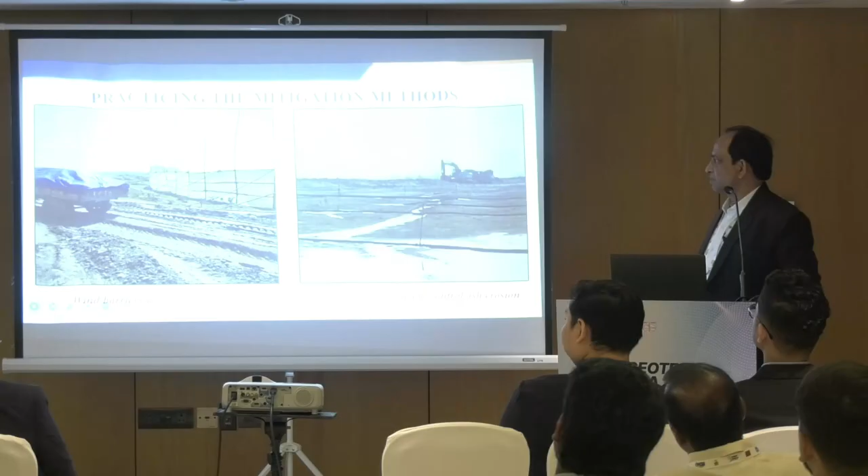Whenever we think of this EICP, enzyme-induced carbonate precipitation, we will go for this surface curing with the geopolymerization technique, wherein we add some chemicals. It can be sodium hydroxide, sodium silicate, like that. They have a mechanism of making polycondensation, and then it will go for hardening of the surface, hardening of the material, so that it will have proper gel, so that it becomes a thick and robust layer.

As all of us know, this geopolymerization is a process where aluminum silicate materials react with alkali activators that will form a hardened cement-like material to some extent, like geopolymer. And this shows significant promise as a long-term erosion control solution for the ash deposits because of two things - long-term stability along with some sustainable aspects.

Friends, this is the ash we got from Ramagundam, NTPC Ramagundam, which is one of the popular plants in South India. With a specific gravity of 2.18, it is a silty sand with good amounts of sand and silt almost equal, and with a very low UCS value of 0.13 MPa.

And then we have gone for this particle size distribution. This basic chemical composition turns out to be class F fly ash because of its low concentration of calcium oxide and huge amounts of alumina, silica, and ferrous oxides. So it turns out to be class F based on this chemical composition.

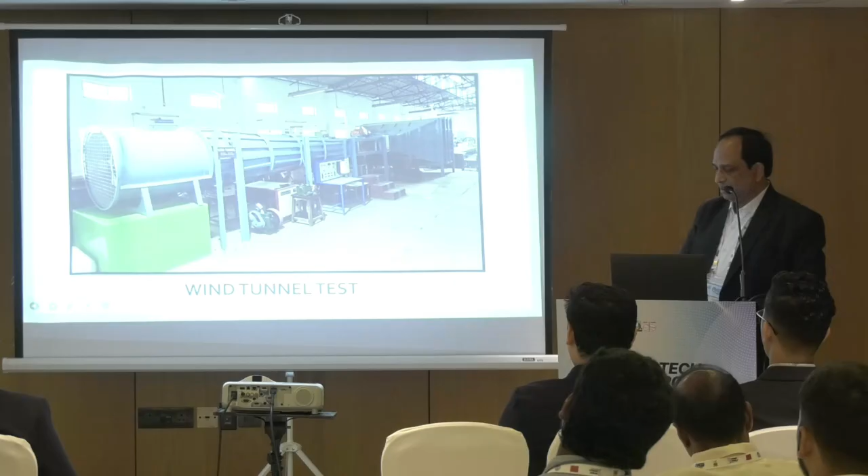This is the wind tunnel test available in the Mechanical Engineering Department of NIT Warangal, wherein we kept the sample here in a tray like this, and allowed the wind to blow at different speeds, and checked the layer, whether it is getting eroded or not. So the surface, as I have already mentioned.

This is the SEM test setup we have along with the EDS unit in CSRS lab in NIT Warangal. Coming to the results, as I mentioned, we had a UCS of 0.13 MPa only, but when we went for a chemical of NaOH with different curing periods, there's a 25 times increase in UCS value up to 3.5 from 0.13. And when we went for sodium silicate at different proportions of 1, 2 or 1.5, it has gone to around 9 approximately. So it has increased 70 times with respect to its original strength of untreated fly ash.

And this is the erosion, we measured rate of erosion. When we compare to the case of untreated fly ash at different wind speeds of 10, 20, 30, and as you can see here, when we went for different proportions at 10 meter per second, with different curing periods of 1, 3, 7, 14. Naturally the 14 day curing period gave very, very less erosion compared to the high erosions. At 10 meter per second, it was 7,500, whereas it has come down to 166, a drastic decrease in erosion.

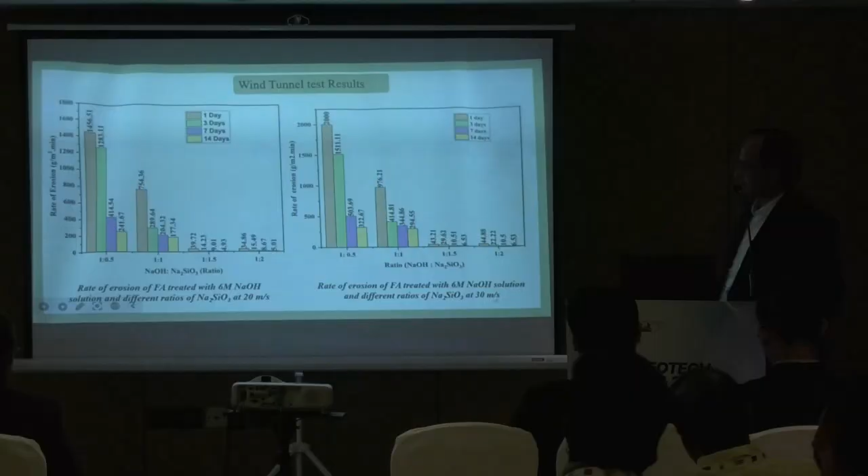When we went for higher speeds of 20 meter per second and 30 meter per second, there is also a drastic decrease. It's only 6.5 compared to my untreated condition of 14,000. So there is around a 99% decrease in the erosion.

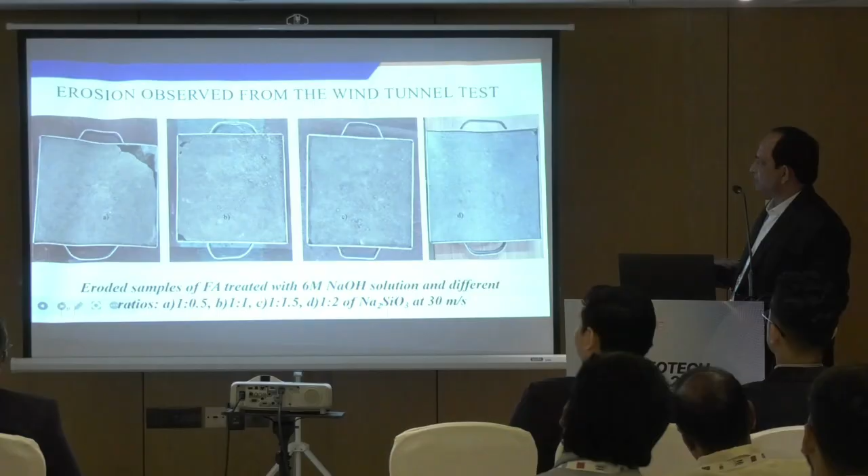These are the trays of different 4 trays for 4 different proportions we had at 30 meter per second. As you can see, there's a lot of erosion here, but not much erosion when you have gone for higher percentages of treatment.

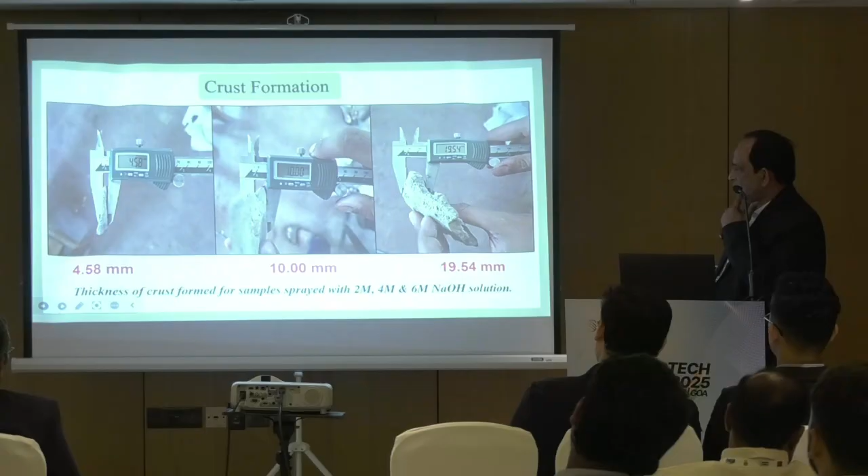Even in SEM, when we went for it, there is a good amount of gel formation for 6 molar based on our findings. Therefore we selected 6 molar even for sodium silicate addition. We calculated the thickness of the crust, how much layer is getting formed, and with different molarities of NaOH, you can see 4.58 and 19.54, almost 4 times increase with molarity, and it's a very good thickness.

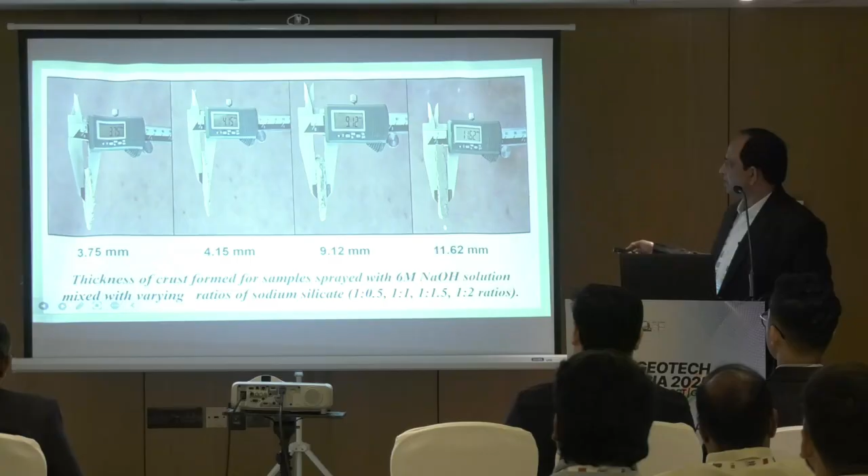The problem with NaOH is it is a little porous. Although it is brittle, we can easily break it. But friends, when we went for sodium hydroxide along with sodium silicate, although the thickness is less, it's a little stronger, that much brittleness. You cannot easily break it. That's the kind of finding we had, although the thickness is less compared to only NaOH, this is showing a little higher strength.

Coming to the conclusions, the present study investigated the erodibility of surface treated fly ash against wind erosion. This geopolymer stabilization of fly ash was evaluated using UCS as an indirect method and wind tunnel testing as a direct method to assess the erosion aspects of fly ash.

The compressive strength increased significantly when treated with sodium hydroxide and sodium silicate. Friends, the erodibility of untreated fly ash decreased by 99%, which is remarkable, when treated with 6 molar with different proportions of sodium silicate. Finally, the microstructure analysis revealed the formation of alkali-activated cementitious gels formed due to geopolymerization, which contributed to the formation of the crust.

Friends, the resulting crust significantly protected the surface from wind erosion, resulting in a dramatic reduction in the erodibility of fly ash with wind.

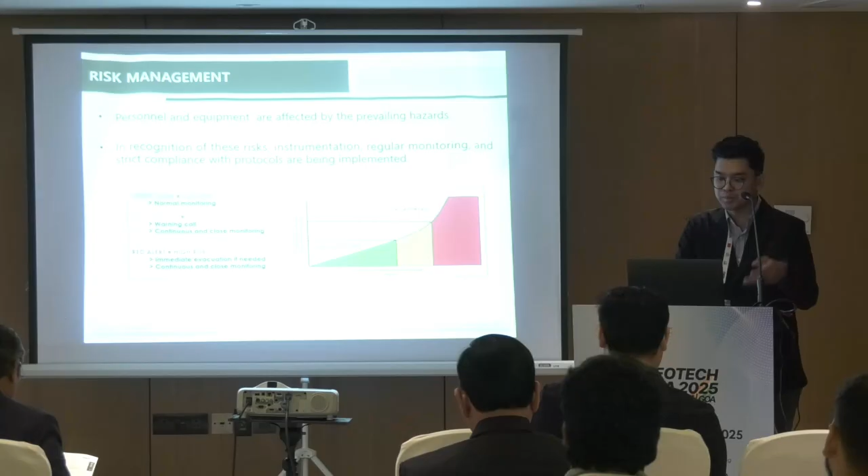For the succeeding presentation, we will be doing the baseline analysis. For the baseline slope models, due to the limited number of strength tests, our analysis primarily relied on data from exploration core boreholes or core samples.

This combination provided calibrated strength parameters suitable for stability assessments, while highlighting the need for additional in situ testing if possible. Since the open pit mine is situated below sea level, the analysis was modeled under fully saturated conditions. These assumptions provide a conservative approach to account for potential groundwater influence on slope stability.

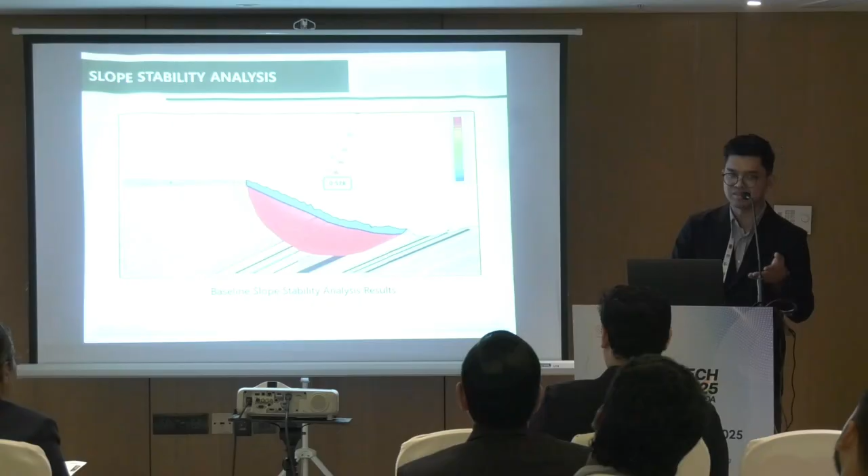As such, sensitivity analysis is needed to establish a more appropriate and realistic set of shear strength parameters and subsurface conditions. So what is sensitivity analysis in slope stability? It is a process in model calibration and validation used to determine and explore the influence of variability and uncertainty of input parameters on the stability of the model.

Next, it is coupled with forensic investigation of actual failure on site. Our objectives of the process: number one, to refine the material properties of the deeper layers in order to eliminate the unrealistic deep-seated failures. Number two, to modify the parameters in the upper layers, where most of the failures have been observed, based on the approach adopted for the deep layers.

Here's our sensitivity analysis process. Phase one entails the sensitivity analysis of the UCS, or uniaxial compressive strength, of the deep layers at depths below 30 meters. Considering this particular site, below 30 meters is generally undisturbed, so the disturbance factor is 0.

Following this, phase 2 was developed to account for the level of exposure or disturbance of the upper layers due to on-site activities such as manual excavation. This accounts for a higher disturbance factor, which is 0.9. Lastly, phase 3, we subdivide the top layer to analyze as in phase 2. This results in a total of 3 geological zones.

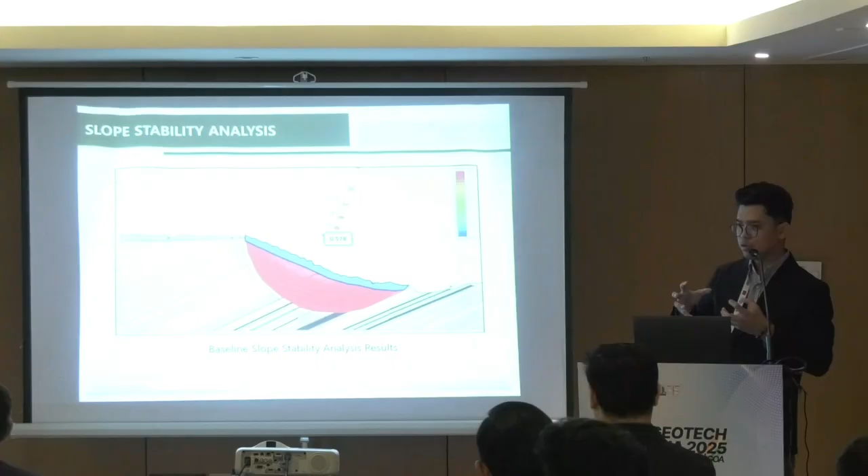So in the analysis, the resulting values are deep-seated, which is more than 200 meters. But in the on-site observation, it's more likely probably in the shaded area of blue, that's 30 meters. So with the sensitivity analysis of doing the phases, we have compiled the possible and most likely probable failures that will occur on site, which is consistent with the on-site observation.

Thank you. And about the disturbance factor you used for those analyses, I think the book of GSI doesn't have 0.9 or something in between. For erratic type of blasting, they have 1 or something, and you used 0.9, right? Yes.

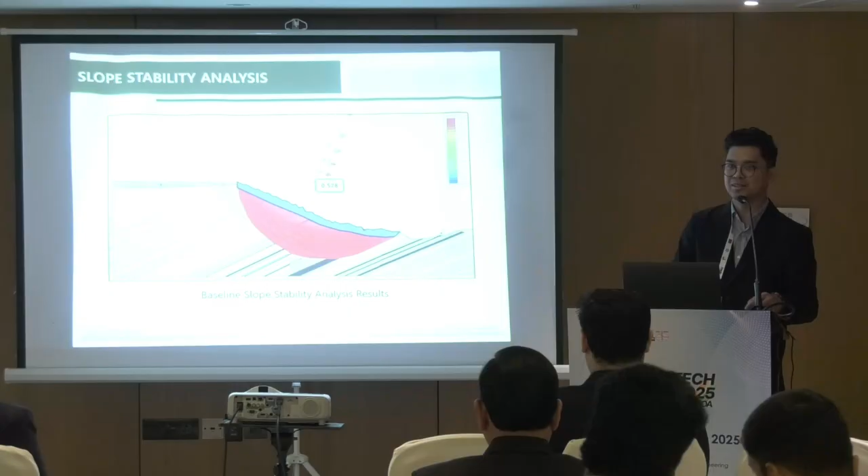Did you use 0.9 to be on the conservative side? Regarding the disturbance factor of using 0.9, we went hand in hand with our geologists on site, and they prefer using the 0.9 disturbance factor since some of the equipment is quite disturbed, more like a value of 0.9. So with that, thank you.

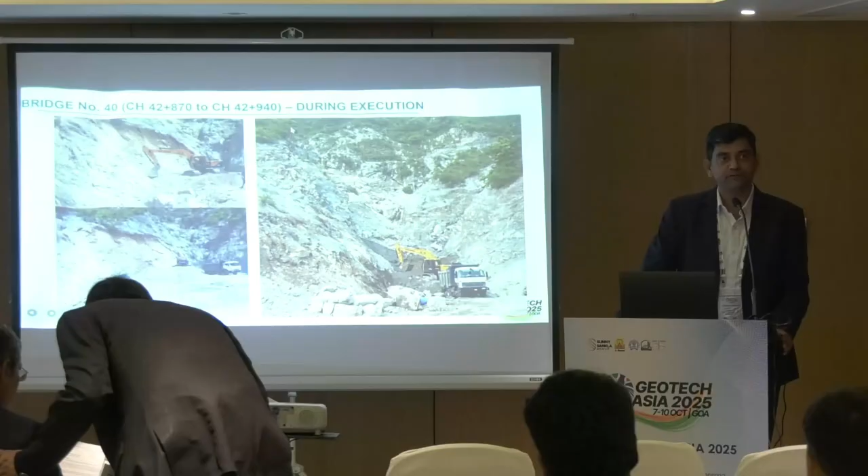I have added some photographs for understanding the material which is getting excavated. The tunnel is hardly 10 meters from here. The photograph on the left shows a tunnel with the same strata. When it's excavated and crushed, it's a very aggressive material. Geosynthetics have certain limitations, especially with very coarse or harsh material. The material has to be really durable to withstand this kind of damage.

Here, being a bowl shape and a 50-meter tall structure, a simple calculation for reinforced soil structure shows a rule of thumb: 60 to 70% of your height is the reinforcement length required. So you would require 30 to 35 meter long reinforcement, but space is not available. That's where we combined the soil nails - back of the slope we used nails, and in the front we put the structure.

For designing this kind of structure, the only guideline available at the time was FHWA, and that was not even a guideline, just a research document. However, being part of the textile BIS committee, we have since come up with a document that now covers design of such structures.

In this project, we have used the stone fascia and a green fascia. The reason for that was to provide the environment back - the greenery which due to anthropogenic activity we have disturbed.

Here we have used the high strength geogrid Paralink with a stiffness range of 1053 to 4232 kilonewton per meter. The anchors used were continuously threaded anchors with yield strength more than 670. These anchors basically stabilized not only the slope, but during excavation the stability of the slope had to be ensured because it's a 50-meter tall structure we are building.

Seismic zone falling in 5, as per IS 1893, those seismic zone parameters have been considered. Typically for reinforced soil structures, fines passing through 75 micron has to be less than 15%, friction angle minimum 30 degrees, and PI less than 20. Fortunately we had a tunnel muck which was very coarse and granular, so that was not an issue.

While designing, the approach followed was first the cut surface was analyzed with the soil nails, and then the reinforced soil structure was analyzed altogether. So three analyses were done: one, cut slope as it is; second, cut slope with nails; and third, the reinforced soil structure, simulating the construction sequence also.

The geogrid spacing here was kept at 0.8 meter vertical spacing, and the layers were compacted at a 0.3 meter maximum compacted thickness.

This is the top view of the bridge. You can see very clearly a bowl shape here. Here you have a big culvert coming - this culvert is carrying a lot of subsurface water from a 6 kilometer long tunnel. Till now, almost 8 years later, the flow has not reduced; it is continuously carrying water. This is the green fascia that's being adopted.

This is the structure, almost close to 40 meters. On the right side is the culvert. On the left side, the merging of the structure with the natural slope was done using a stone fascia. The reason for that - when you have rainfall, possibilities of soil erosion would be there.

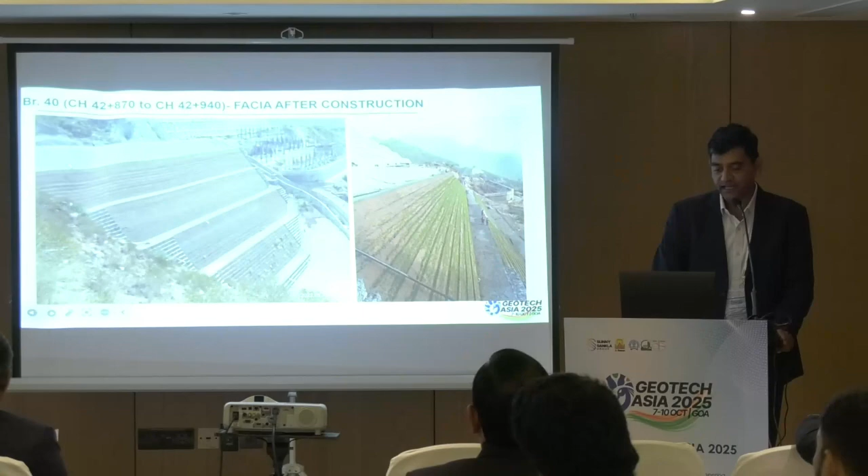And the purpose of embankment on top was for railway officials' safety point of view—this was put in place for safety reasons.

So these are photographs of a stone fascia and green fascia under construction, and this is the fascia after construction. This is after 6 months. And this is a trial which was done on the structure.

This was the trial done on the same structure before it was inaugurated by the Honorable minister. The tunnel you see, and on the left hand side, valley side, there is a structure there.

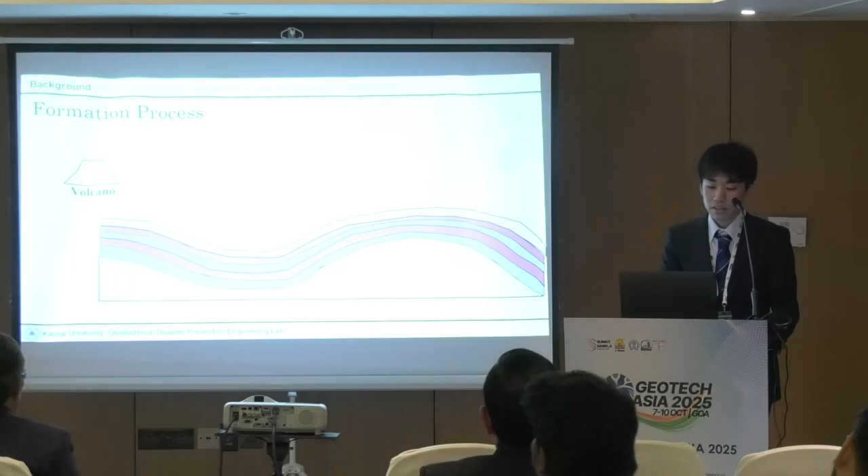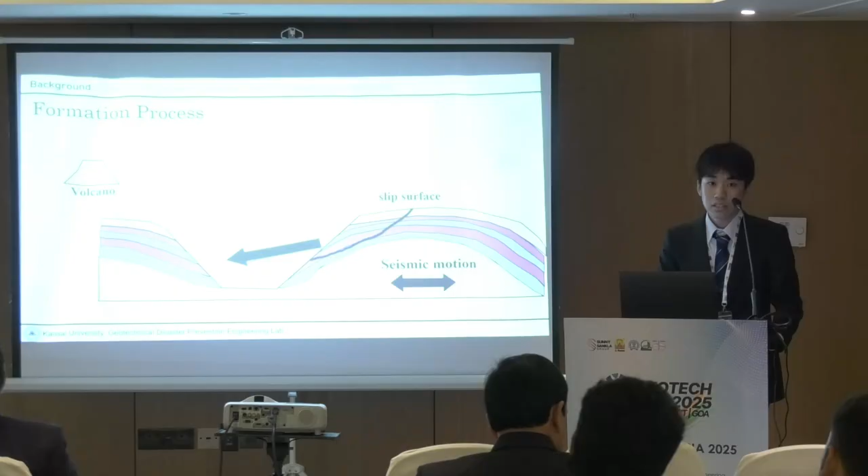This is now the original ground, the volcanic ash area. As erosion shapes the slope, this slope becomes gently sloped. When the earthquake happened on this slope, the seismic motion created a slip surface. This slip surface is first a weak layer, like this, then the soil mass moves in this direction. This is a very big landslide.

So in this research, we define this type of landslide as a catastrophic landslide—the phenomenon in which material slides down gentle slopes with high fluidity, gradually breaking apart and spreading.

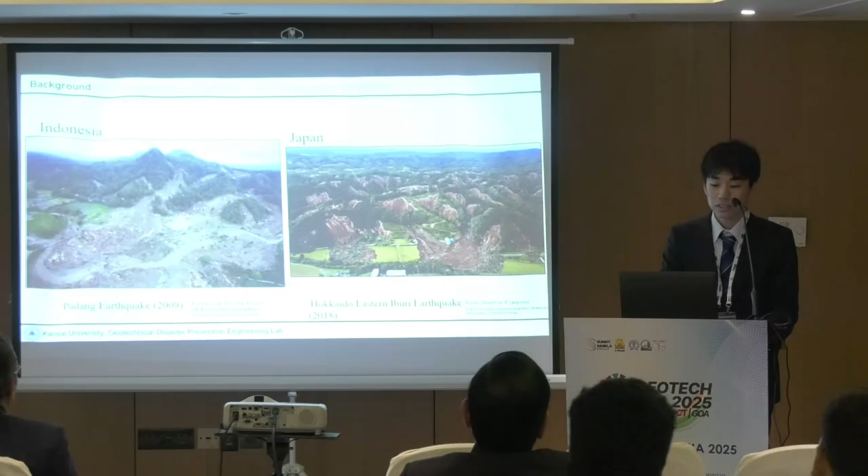Also, catastrophic landslides have occurred in Indonesia and Japan. This is the Padang earthquake, and on the right side is the Hokkaido Eastern Iburi earthquake. These catastrophic landslides are contributed to by halloysite. Halloysite is a clay mineral, and this shows the formation of halloysite. This is a picture of halloysite forming in an old weathered zone.

Upper layer is water flowing and pumice area. This halloysite is one of the contributing factors to catastrophic landslides.

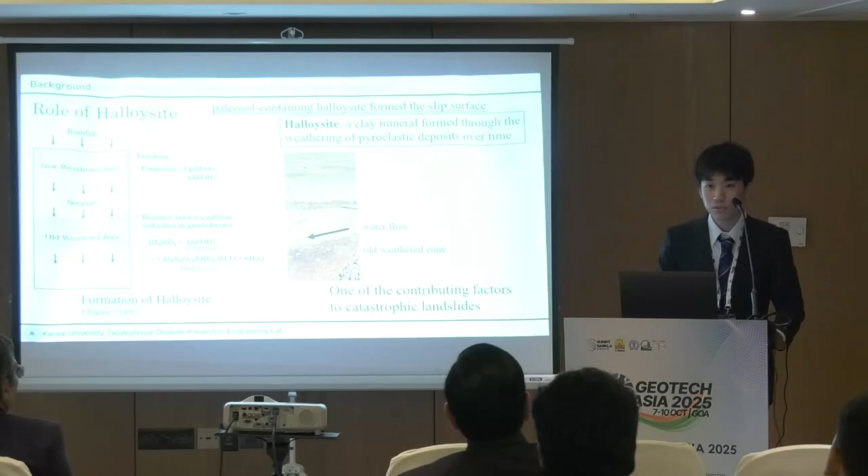So in this study, we conducted field and laboratory investigations to determine the geotechnical properties of halloysite-rich paleosol. We conducted this study at a site in Nishigo village, Fukushima, Japan.

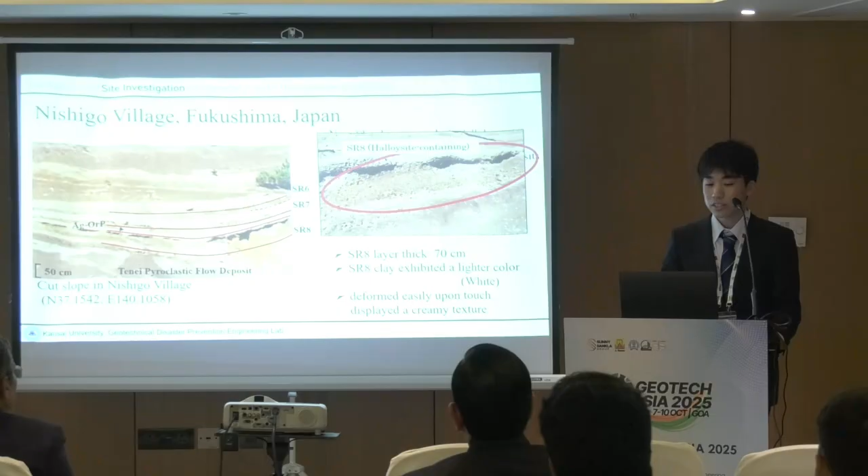And we conducted soil sampling. The sampling site is shown in this picture, the barrel-shaped outcrop—this is a water zone. We collected block samples of halloysite-rich volcanic ash soils.

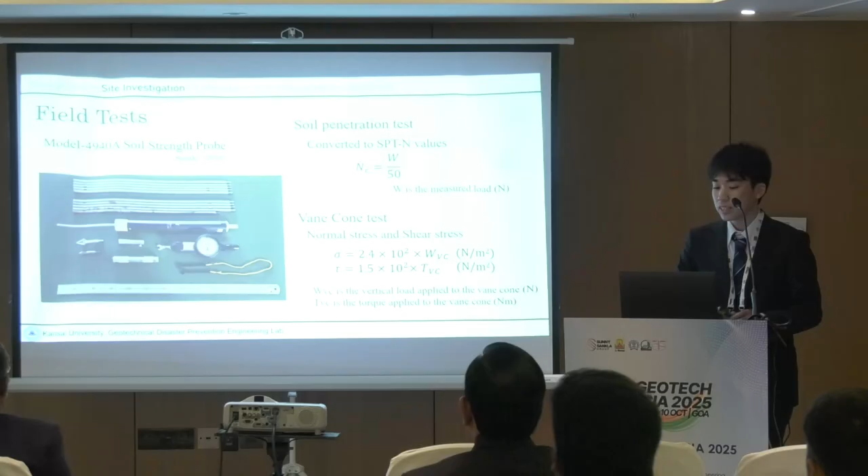And we conducted field tests. We used the soil strength probe by Sasaki 2010, then conducted the soil penetration test to convert to SPT N value, and also the vane cone test. Here are the results of N values.

We conducted the horizontal penetration test for the SR8 layer, which means the halloysite-containing layer. The results show a relatively low SPT N value. And this is the vane cone test: for the SR layer, cohesion is 3.29 and friction angle is 9.14.

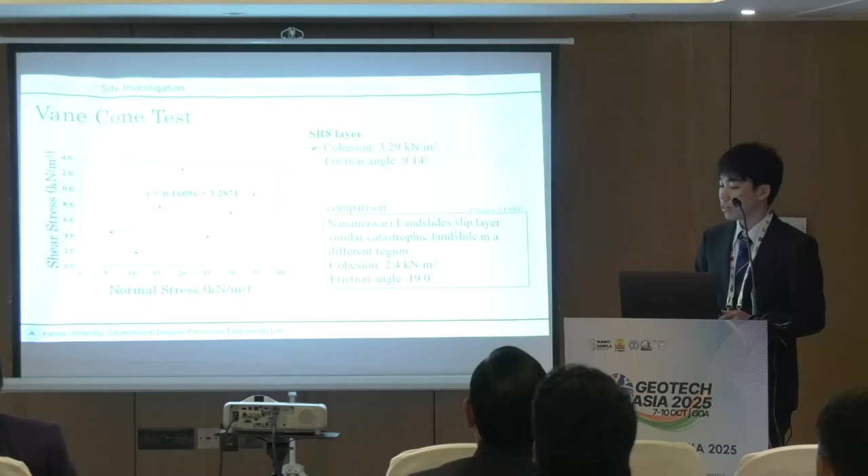Compared to past research in different regions by Chigira, the cohesion is almost the same, but the friction angle is twice as much.

Also, this water-containing layer in this research shows high water content even with little rainfall. And we conducted an unconfined compression test of the SR8 clay layer.

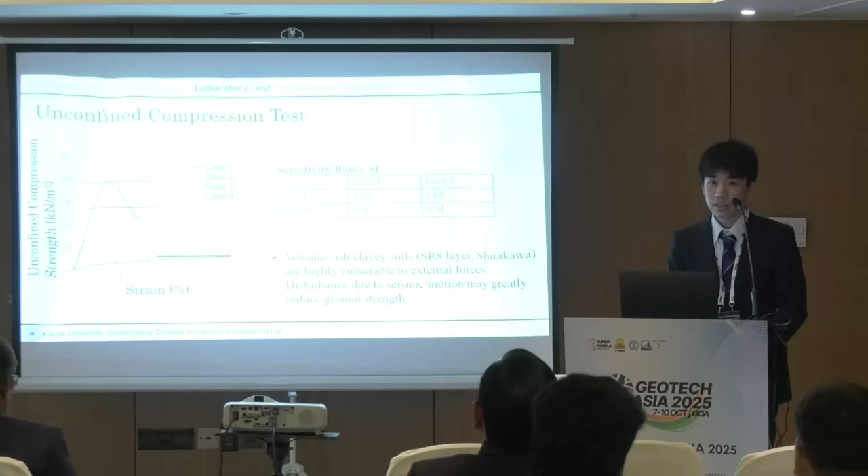In case 4, there is an 86% reduction compared to case 1. This is the sensitivity ratio for case 3 and case 4.

Due to these results, the SR8 layer containing halloysite is a very sensitive clay, with very low strength and very high sensitivity ratio. Disturbance due to seismic motion may greatly reduce ground strength.

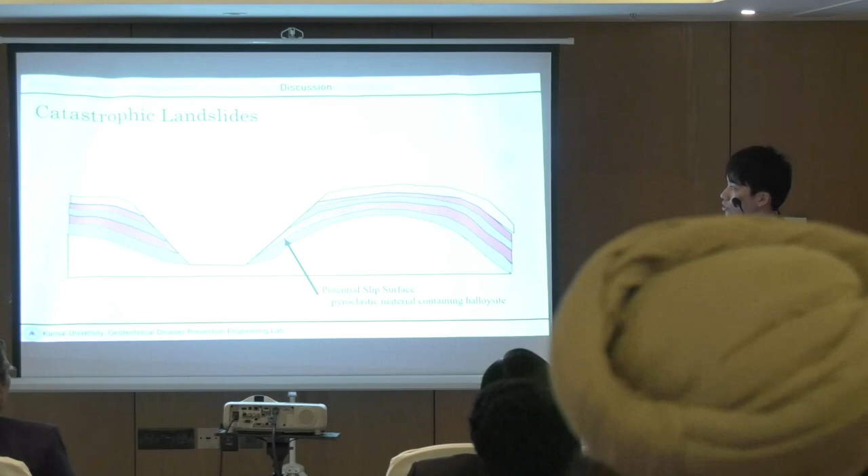Finally, I show this same figure from the introduction. The catastrophic landslides have a potential slip surface, like here, between the upper and lower side. This layer is pyroclastic material containing halloysite. In this study, this slip surface layer is SR8.

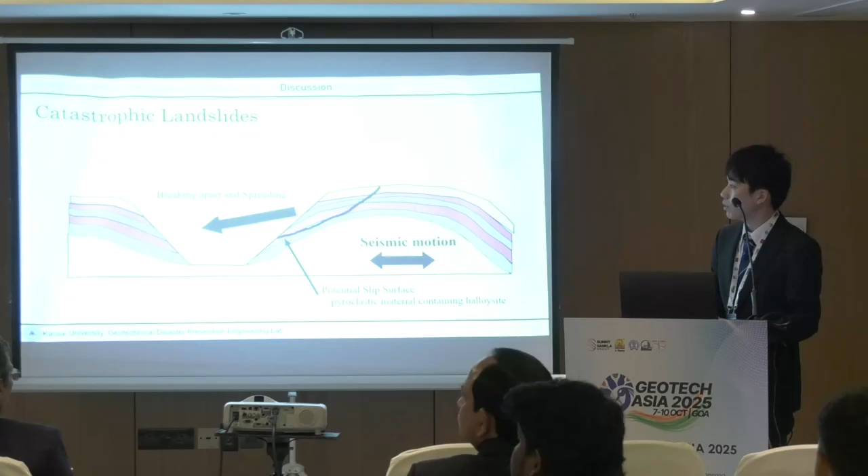When seismic motion happens, the slip surface forms here, breaking apart and spreading. This causes very huge landslides, so we call these catastrophic landslides.

Also, in India there are some volcanic regions, meaning they have a potential risk of catastrophic landslides. This is a very important finding, not only in Japan but also in the world, including India. That's all for my presentation. Thank you very much for your kind attention.

A couple of questions. No? I have a question on sensitivity.

Can you go there? I think you combined cases 2 and 3 and did something there. Can you go to that slide? Yes, here, what is that? I could not follow - case 1, case 2, and case 3, case 4. For example, the 2.42, is it corresponding to case 1 or case 3?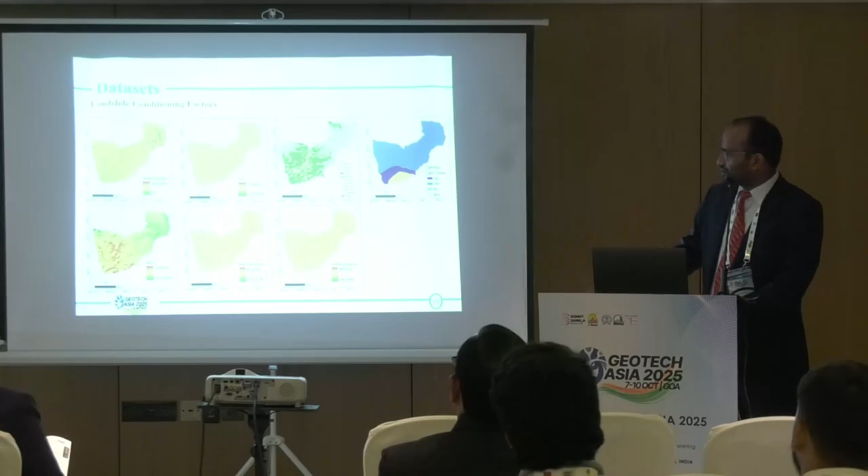We have 11 categories of land use/land cover, and 4 different geology types based on the study area, and then NDVI and plan and profile curvatures. Now our dataset is ready.

For each grid, we make the model, and it automatically extracts the data of each pixel. We use supervised classification techniques to estimate the probability of occurrence of landslide in each pixel, using the known landslide and non-landslide points for model training and testing. The final model is used for predictive performance and to generate the susceptibility mapping.

Basically, two machine learning classification algorithms are used: logistic regression and random forest, as we discussed earlier. They have different characteristics - logistic regression is simply a binary classifier, good for linear relationships, using a sigmoid function to map the probability.

Random forest is an ensemble of decision trees based on different decision trees, and they do majority voting to decide, like a voting system.

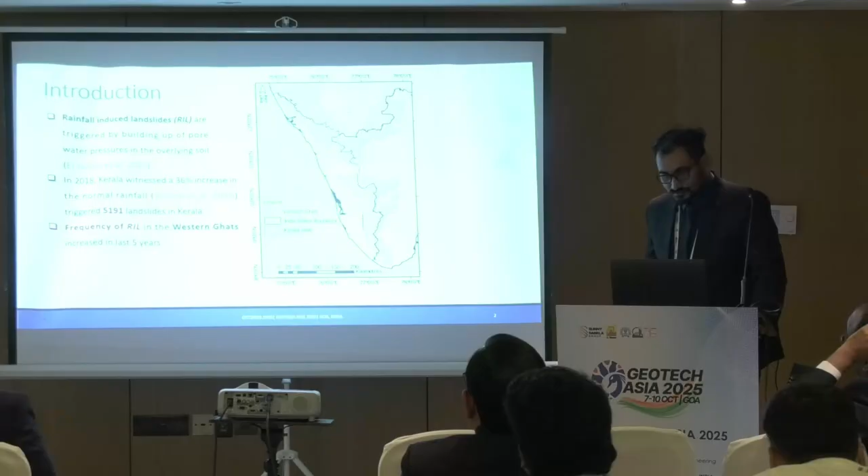I am from Kerala, the southern part of India, where you can see the Western Ghats surrounds almost 40 or 50% of the state. In 2018 itself the state was hit by more than 5,000 landslides, and after 2018 we continued to see frequent landslides throughout the year.

The last one was in Wayanad district that took over 100 lives, thus raising the question of why this is happening frequently, and how, where and when it is happening.

Our research was mainly focused on addressing some of these questions. Rainfall induced landslides in Western Ghats are mostly shallow, as you can see from this figure, and hence it is idealized as an infinite slope stability problem.

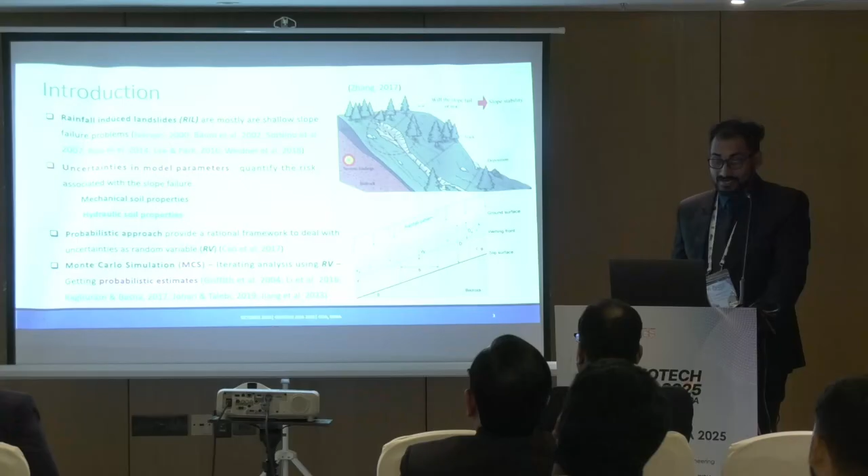But quantifying the risk associated with these slopes doesn't lie in the idealization of infinite slope. Instead, it actually comes from the uncertainties of the model parameters, which can be soil properties like shear strength or hydraulic soil properties like permeability, etc.

A probabilistic approach actually gives a rational framework to deal with this uncertainty by making use of these properties as a random variable, following a normal or log-normal distribution. We can make use of Monte Carlo simulation methods to iterate the slope stability analysis using the random variable and get probabilistic estimates. But the real question is whether these soil properties are truly random.

When you take two soil samples closer to each other, we get almost similar soil properties, but when they are farther away, the soil properties differ. So it is not exactly random, instead it has a dependence on location. Hence we coined the term spatial variability of soil, which plays a significant role in the entire geotechnical analysis of different aspects.

So whether a probabilistic framework is accounting for spatial variability, we can divide it into a single random variable approach and a random field theory based random field finite element method.

In a single random variable approach, what happens is that in one Monte Carlo iteration, the entire slope will be treated as a single property of C value or phi value based on this random distribution. But when it is based on random finite element method, the entire slope is discretized into small elements, and each element will carry a different value for one set of iteration itself.

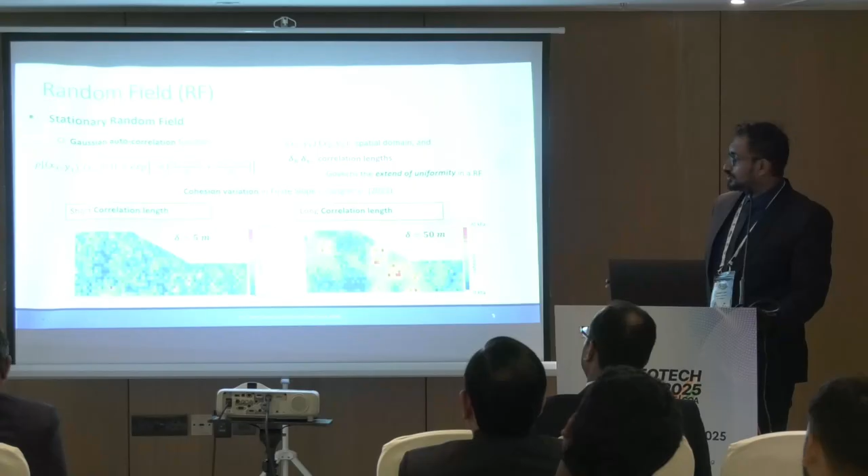So this is based on the same random variable, but it has different behavior because of the random field. We have tried to incorporate this random field concept into the Plaxis framework, which is one of the most commercially used FEM softwares.

So we have made a framework where a preliminary FEM analysis is required based on the geometry we are setting, and we discretize it into soil clusters. We assign uncorrelated random properties using Python scripting, then extract the coordinates as an ASCII file, which is fed into a Python framework that generates the random field we need based on the correlation function.

This can be easily imported into the Plaxis framework to do analysis like coupled flow deformation or strength reduction methods, and get the factor of safety estimates. The process is then iterated using Monte Carlo simulation to get probabilistic analysis estimates. So our key focus is mainly on rainfall-induced landslides.

So we are more concerned about the variability of hydraulic conductivity. We have used an infinite slope stability kind of geometry that was recommended by Ubonchi et al. for FEM softwares, especially in Plaxis.

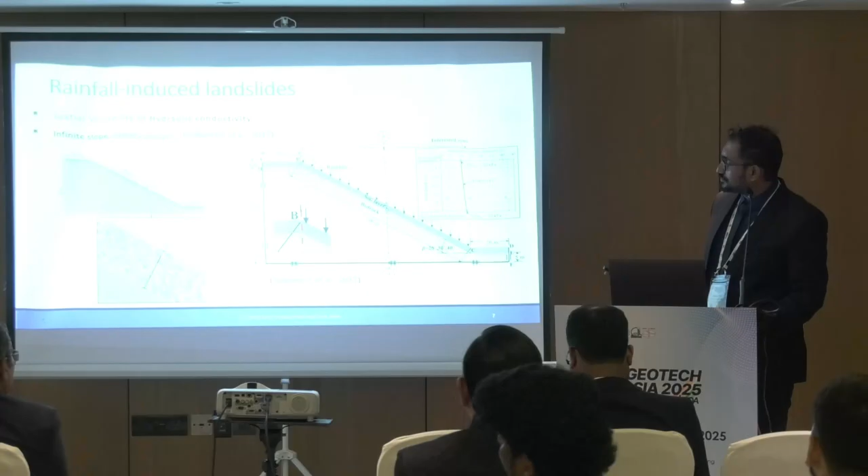So here is the geometry we have used, and we have only varied the properties of the soil layer on top of the bedrock. This layer is discretized into different clusters, and it will be assigned a random field of spatial variability to account for the spatial variability of hydraulic conductivity.

It is treated as a log-normally distributed random variable with a mean value of 1 × 10⁻⁵ meter per second, and the coefficient of variation is varied from 60, 75 and 90%. It is treated as a stationary random field with delta v at 3 meters and delta h at 50 meters. The rest of the initial conditions and constitutive models are all taken as per the deterministic Ubonchi et al. paper.

So when you look at the framework, from the remote scripting we have generated, we are able to assign a random field of permeability, do a coupled flow deformation analysis, and get the FOS as per the strength reduction method. Then we iterate it using Monte Carlo simulation for about 2,500 iterations.

We had to iterate to get convergence, and we calculate the probability of failure for each time step of the rainfall applied. We are giving a 10 mm per hour rainfall throughout the duration, and we also get a histogram plot of the failure time to find the most probable time of failure.

Now, looking at the results, this is mean factor of safety versus time. For the deterministic case by Ubonchi, the factor of safety was 1.9 when there was no rainfall. As 10 mm per hour rainfall proceeded throughout the period, by 60 hours it reached a factor of safety equal to 1, the critical state.

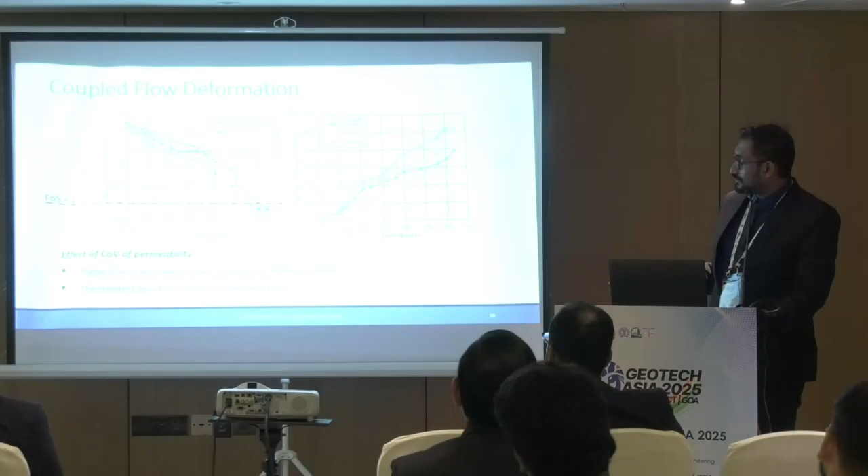When we induced a coefficient of variation of 60% to permeability, we can see that as the coefficient of variance increases, the factor of safety reduction gets faster, and the slope fails a bit faster. Also, the standard deviation corresponding to the mean factor of safety increases with time.

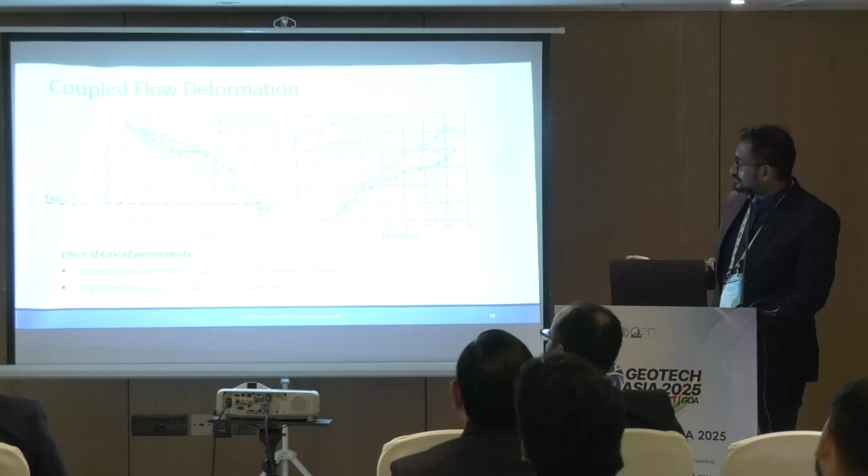For all three cases, you can see distinct variation being shown as it approaches the failure time. Here you can see a little bit more distinct behavior with the case of probability of failure. To understand more, I have divided it as per the US Army Corps of Engineers levels. You can see hazardous level here with the probability of failure corresponding to 10 raised to minus 1.

And you can see in about 47 hours, the COV corresponding to 90% is failing. To understand more about it, we have actually plotted a probability density based on the time of failure. Here for lower coefficient of variance, we have a proper peak, but when the variance is increasing, you are not able to determine a proper time of failure, so there is an uncertainty associated with it.

Effect of correlation length also gives a similar trend, when heterogeneity is high for a little bit shorter theta v value or delta v value. Here also the failure pattern is a little bit uncertain because of no proper peak.

Coming to the conclusion, we can say that the impact of variability associated with saturated permeability is really important, as higher coefficient of variance is accelerating FOS reduction and triggers early failure and raises probability of failure. Failure timing is also uncertain when the coefficient of variance is larger, because the time of failure distribution is getting broadened, highlighting greater uncertainty and increasing risk and unpredictability.

Also, the role of correlation length had a similar impact when shorter vertical correlation lengths were being considered. As for practical implication, we can say that both the magnitude, corresponding to coefficient of variance, and spatial structure, corresponding to correlation length of the permeability field, have to be considered for realistic slope stability analysis when it comes to a rainfall induced landslide.

As for scope of extension, we have developed an RFEM framework to be extended to a non-stationary permeability variation, which is able to account for even weathered soil and also the impact of climate change as well. So these are the references, and thank you for listening.

Thank you. One quick question. Yeah, please. Very good presentation. Thank you. Yeah, so I have a question.

Where is the water table? Two questions actually: where is the water table, and how did you limit the suction minus 50 to minus 80 kPa in Plaxis? The initial water table was set in such a manner that it is actually set below the bed level, to get that same variation as per the Yabonji paper. Then the water table is allowed to develop over the bedrock as time proceeds. Okay, yeah, okay, thank you.

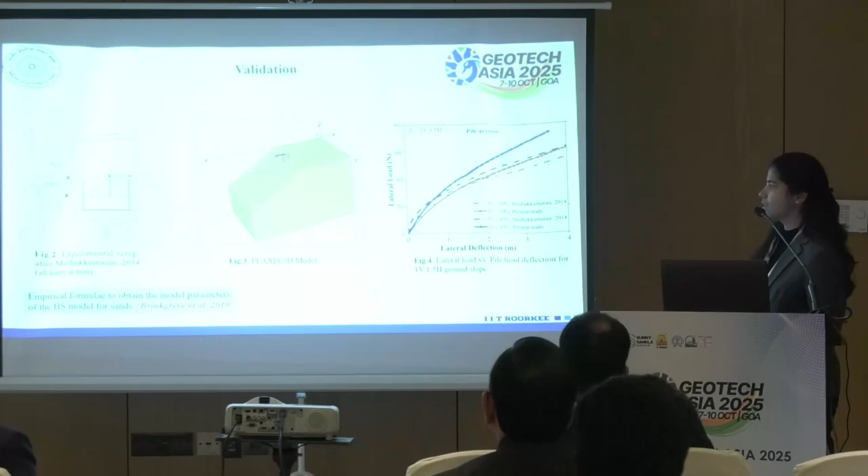I found that the laboratory study and the Plaxis study are almost the same. From this, I can say that the parameters I have used in this study can be further elaborated and used. In this study, I have tried to give a lateral displacement at the pile head, limited to a value of 0.2d. The diameter I have used is 0.8 meters, so in this total study I have used a lateral displacement of 0.16 meter at the pile head.

Then I have found the lateral pile capacity, which I have stated as the ultimate lateral capacity of the pile. These are some of the results. Here I have varied the ground slope, with 0 degrees corresponding to the level ground, and I have varied the slope to 10, 20, and 30 degrees.

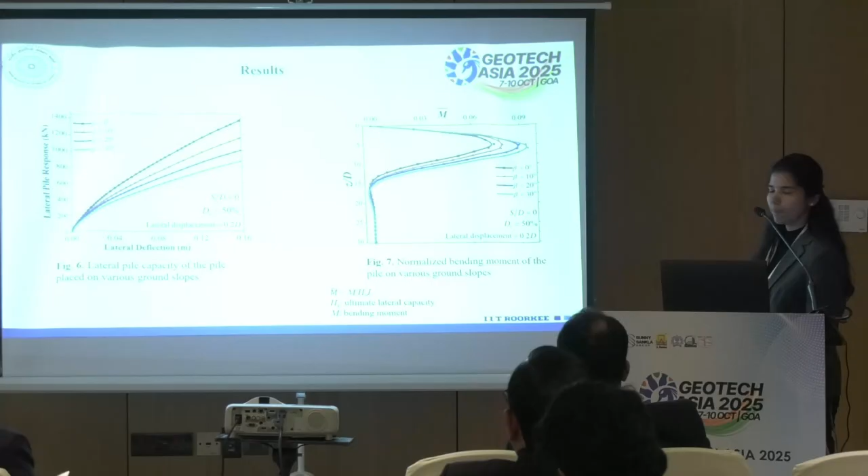As we know, when I have made a lateral displacement of 0.2d, that is nothing but 0.16, you can see the amount of decrease in the lateral capacity as there is an increase in the ground slope. Here I wanted to specify the amount of reduction in the lateral pile response, shown in the lateral load capacity, and on the right side it can be seen in the form of normalized bending moment, normalized using the ultimate lateral capacity and the length of the pile considered.

The length of the pile is 24 meters, and here it can be seen for the various ground slopes. As the ground slope is increasing, the bending moment is increasing. And here it can be clearly seen, this is the ultimate pile capacity - as the ground slope is increasing, the value of lateral pile capacity is decreasing. You can see the amount of reduction from the level ground to the sloping ground, and this is the amount of increase in the bending moment.

You can also see this Z max by D, which corresponds to the shift in the maximum bending moment. When it is shifted from level ground to sloping ground, the maximum bending moment point also shifts downwards.

Here you can see all the different cases that I have considered in the study. We are comparing the pile on the embankment side and also the sloping side. Here A, B, C, D correspond to the pile position where S by D is from minus 4 to plus or minus 16. This is the amount of lateral pile capacity shown.

This is the case for the critical slope of 30 degrees, and here it can be seen that the lateral pile capacity is decreasing. The black line corresponds to the level ground, and you can see the amount of decrease when the pile is on the slope side.

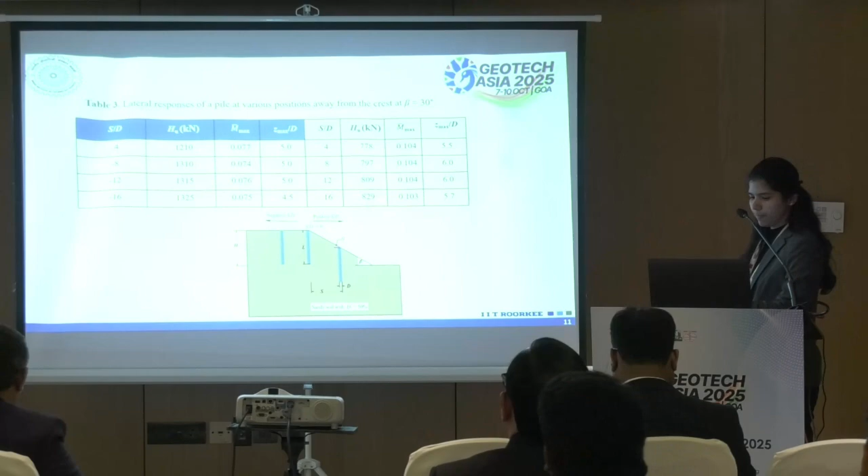Here is the total table showing the difference in positions - the amount of lateral pile capacity, maximum bending moment, and the shift in the maximum bending moment position for various positions. Towards the conclusion, I just wanted to tell that when there is a change in ground slope...

the lateral capacity is decreasing and maximum bending moment is increasing. This is because of the decrease in the passive resistance when there is a change in the ground slope. I have also changed the distance from the crest on the left side and also towards the right side, and I have also varied the ground slope. So this is a part of my whole study. In this, we wanted to show the effect of passive resistance.

And these are the references I have used for my study. Thank you.

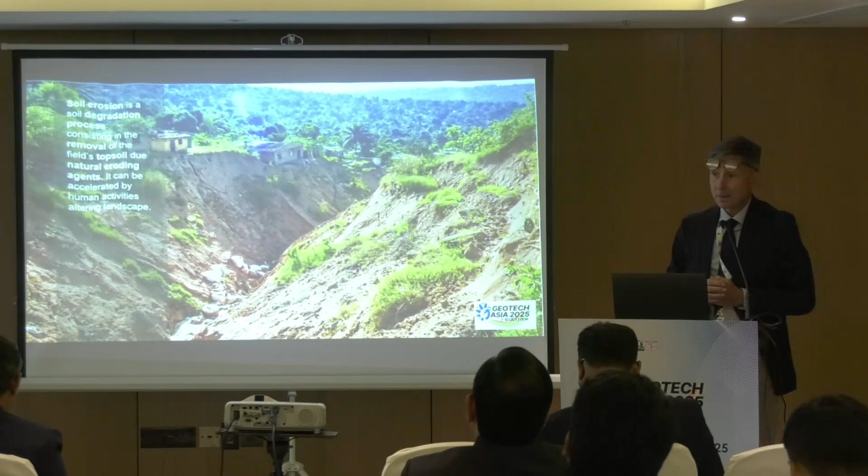Soil erosion is a soil degradation process consisting of the detachment of the topsoil due to the action of eroding agents. When soil is detached, it is then transported away. This process occurs on a geologic time scale, but when human activities alter the landscape, it can be greatly accelerated.

The two most common causes of soil erosion are water and wind. Water, in the form of rain, causes the displacement of soil particles close to the surface, and runoff can cause the carving of small rills and channels on erodible soil. On the other hand, strong winds can bring fine soil particles into suspension, while larger particles can be moved by bouncing and rolling mechanisms.

Usually vegetation, if well established, is considered sufficient protection against erosion, since vegetation cover can provide physical protection of the soil surface, and the root apparatus can hold it in place, preventing soil from being blown and transported away.

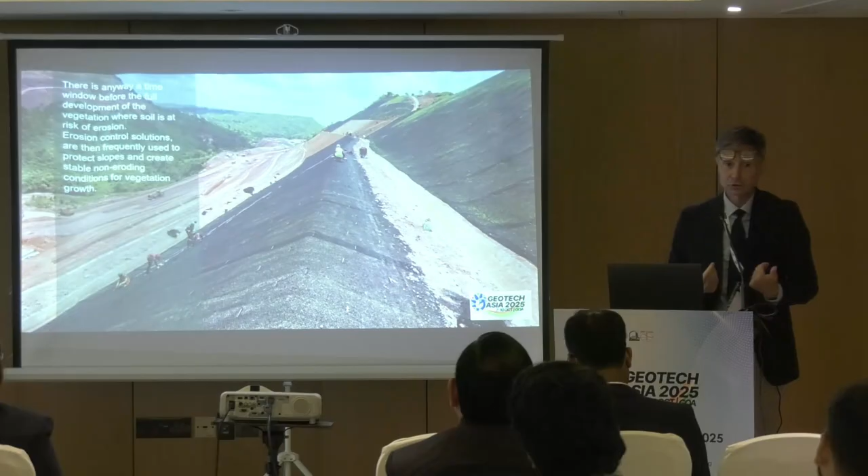Based on literature data, 80% vegetation coverage for clay soil and 70% for sandy soil is usually considered sufficient protection. But even if this percentage is reachable, there is still a time window until full development of the vegetation, when the slope is at risk of erosion in case of intense rainfall. That's the reason why there are many erosion control solutions available to protect soil from erosion and create favorable conditions for the development of vegetation.

Within these solutions, geosynthetics have emerged in recent years as a cost-effective and sustainable solution.

Let me have a look at the classification provided by the relevant ISO standard 18228, part 8, which is still under publication. It hasn't yet been published, but geosynthetics addressed to erosion control solutions can be classified based on product configuration—meaning mat, geogrid, web, and so on—based on the origin of the material, substantially synthetic versus natural material with related performances, and the duration of the protection.

We have Permanent Erosion Revegetation Materials, with the acronym PERM, and Temporary Erosion Revegetation Materials, with the acronym TERM. Both work as a system in combination with soil and vegetation in order to protect soil from erosion. But in the first case, regarding permanent erosion and revegetation material, geosynthetics are called to provide permanent protection thanks to their long durability.

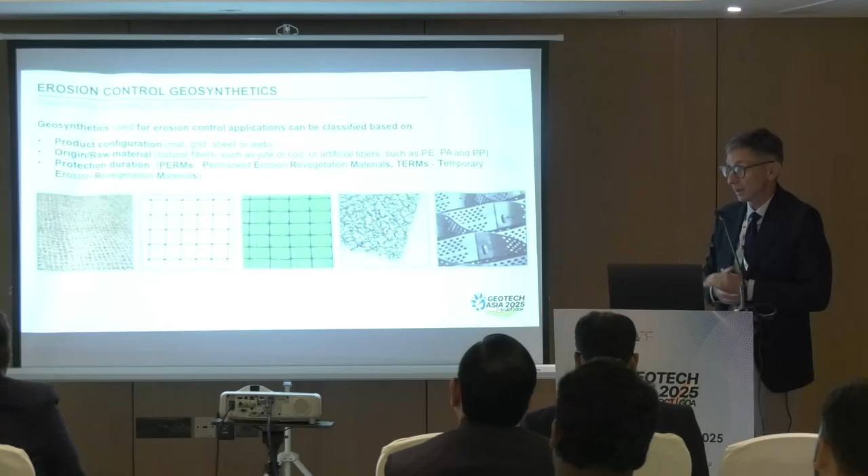Instead, for temporary erosion revegetation materials, they are called to create the favorable conditions for the development of vegetation, which will itself become the protection against erosion.

Typically, erosion control solution design suffers from a lack of scientific rigorous approach. Typically, the selection of erosion control products is based on knowledge and lessons learned from past projects. Instead, monitoring and modeling the erosion control process can help identify the reason behind the erosion process and support the identification of the proper mitigation or restorative solution to be applied.

The RUSLE equation, issued in the late 60s by the US Department of Agriculture, is the most common model used to model the erosion control process. It's a universal format requiring the evaluation of the factors included in the formula based on specific statistical evaluation on a local basis. It basically provides the soil loss with reference to different factors.

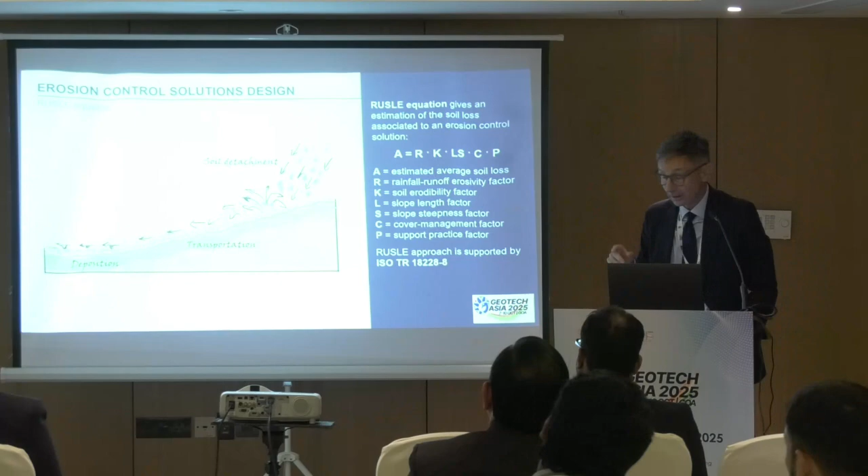C, the most important one, is the cover management factor, and P, the support practice factor. Let's have a look at each of them.

R, rainfall and runoff erosivity factor, depends on local regional rainfall so it can be estimated strictly based on pluviometer readings, but there are many empirical formulas providing an estimation of the R factor.

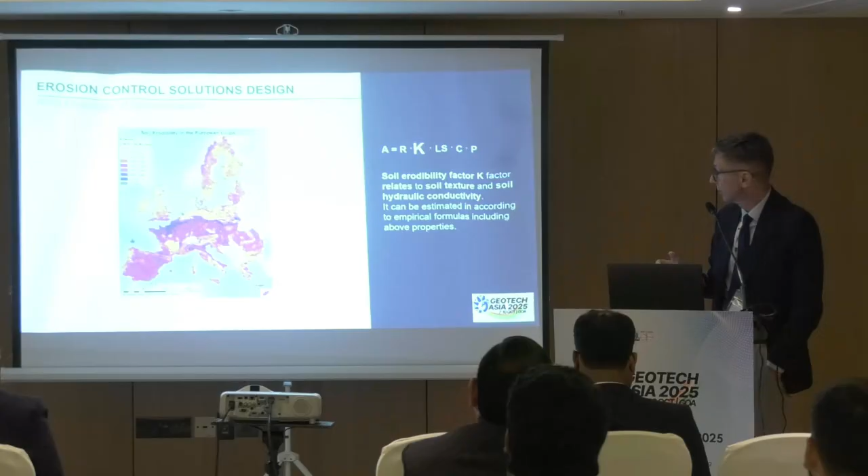Then K, which expresses the tendency of the soil to be eroded, is directly correlated to the soil texture, the different percentage of clay, gravel, sand, and so on, and the hydraulic conductivity of the soil.

L and S, no need to go deeper on this, reflect the configuration of the slope in terms of length and inclination.

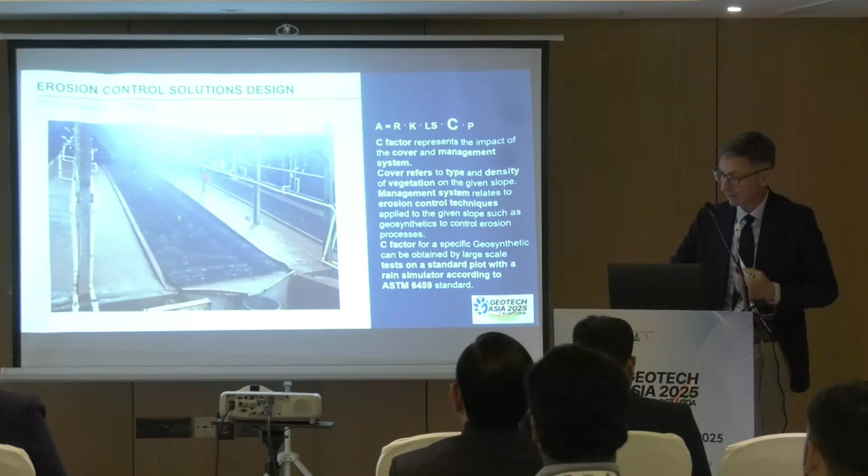The C factor, the most important one, can only be obtained through full-scale or large-scale laboratory tests according to the relevant ASTM 6459 norms, and provides the impact of the vegetation and erosion control technique. In our case, that means geosynthetics installed on top of the slope.

Finally, the P factor is the support practice factor, reflecting agriculture landscaping technique that is usually taken equal to 1, neutralized in construction projects.

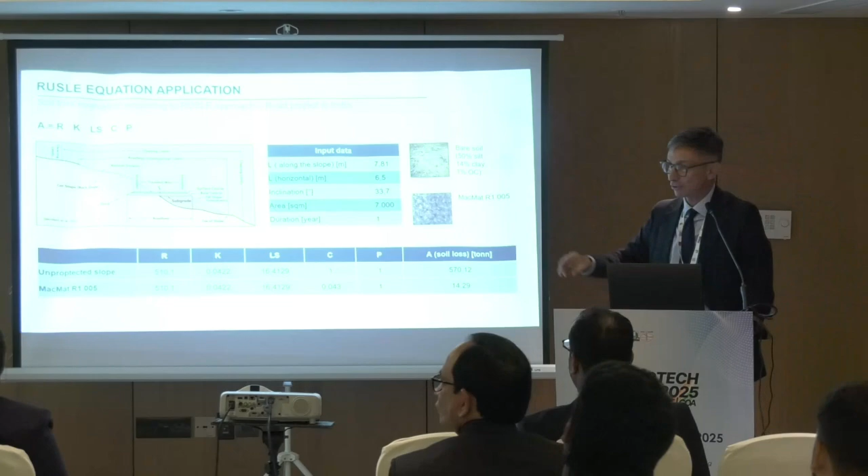Just having a look at the application of the RUSLE equation - I'll finish in 1 minute - looking at the evaluation of soil loss based on the equation for a hypothetical road project in India.

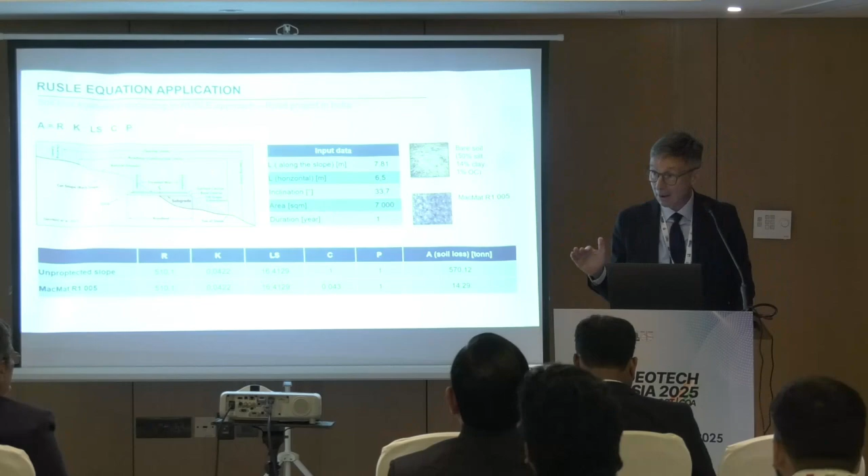Referring to a slope having a length of 7.81 meters, an inclination of 33.7 degrees, for a coverage area of 7,000 square meters, and considering an evaluation period of 1 year, we can evaluate the soil loss for bare, unprotected soil without anything on top. There will be 570 tons for the 1-year period.

Instead, protecting the same slope with the material proposed by our company - a geomat reinforced with a polymeric geogrid - the result will be 14 tons. You can see the difference in terms of reduction of soil loss.

Let me conclude briefly. As you have seen, there are many solutions to protect the slope and create favorable conditions for the development of vegetation. There is a lack of scientific approach in the design. That's why applying a design method based on the USLE equation can provide guidance and support in selecting the proper material to protect slopes from erosion.

But the USLE equation, specifically the R factor, relies on different factors based on statistical analysis. Further studies are requested in order to incorporate the effect of climate change into this evaluation, to obtain reliable and consistent evaluations of soil loss.

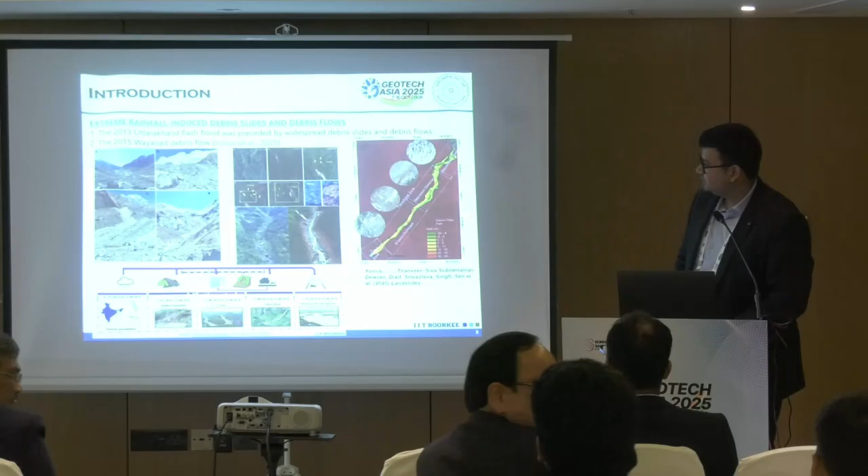This is the presentation outline - I will skip this. We are all well aware of the problem of landslides and what it does to people, as well as the economic and transportation disruptions.

If we look specifically into the landslide problem, it is a scale-dependent problem where we have landslides happening at the scale of, let's say, 1 meter to 100 meters, 10 meters to 100 meters. That is at the slope scale.

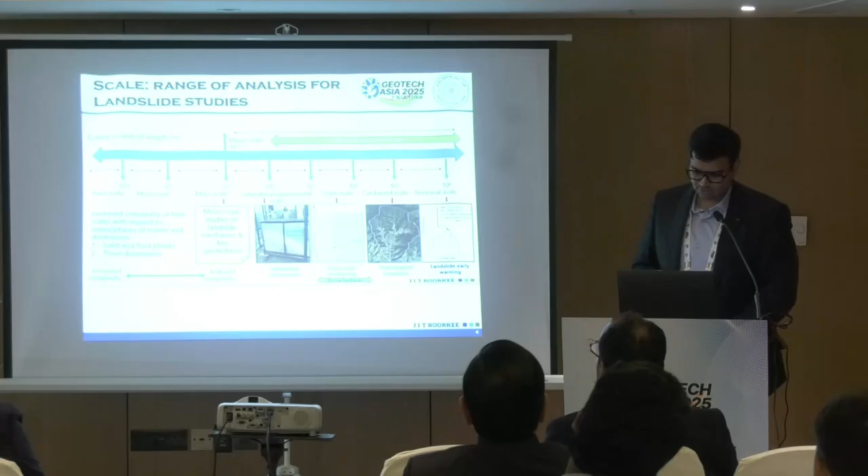Whereas we have catastrophic conditions, mainly driven by rainfall, where a catchment, a hydrological boundary, experiences a number of landslide instances, let's say 1,000 or so. Whenever this disaster strikes, whenever the hazard becomes a larger catastrophe, we have 1,000 landslides all across the hill slopes.

So for the government, for disaster management, we have a bigger mandate to inform people before a landslide happens. That's why we need an early warning system at this scale - the territorial scale. I'm going to talk about territorial scale landslide early warning systems specifically.

But for the territorial scale landslide early warning systems to work, we need an understanding of landslides at the slope scale as well as the hydrological control at the catchment scale. Of course we cannot study everything at the slope, so we do laboratory experiments using reduced-scale flumes and so on. This is the overall story.

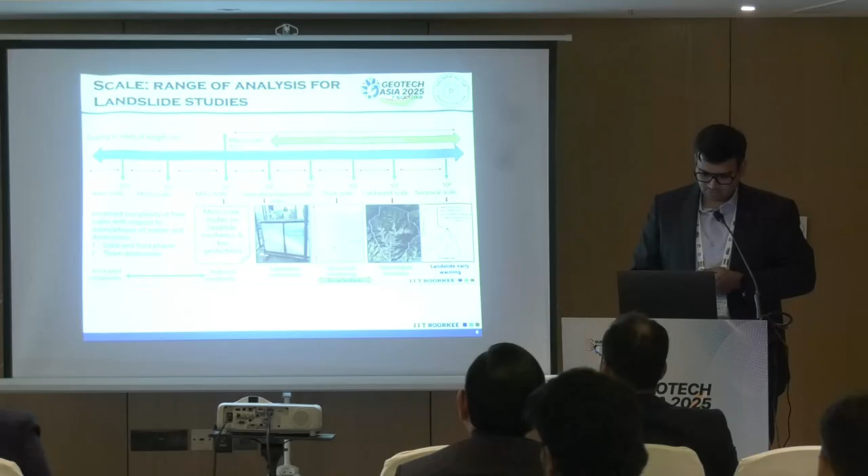In case of debris flows also, saturation often happens. But before saturation, the initial moisture content can have a larger say in the triggering as well as the volume of the debris flow.

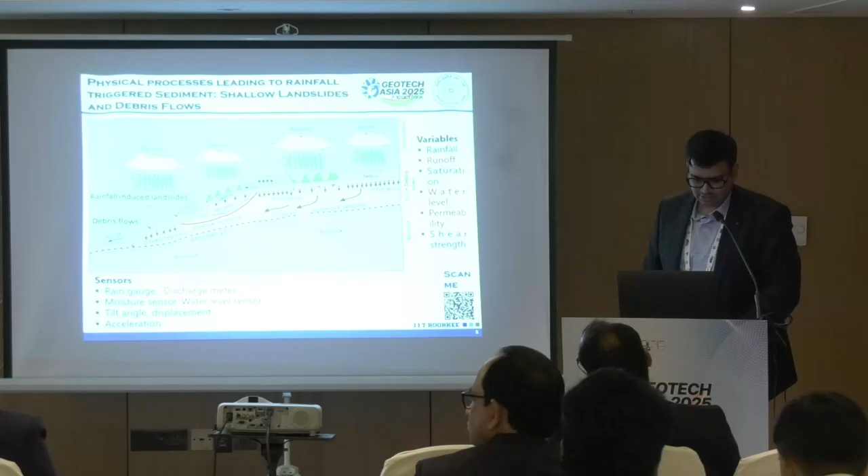So we do have a few variables which can inform us about the occurrence of a landslide, let's say an hour or six hours before. But we need this information through some proxies at the territorial scale so as to forecast landslides at the regional level.

Some understanding is required, and a global outlook of territorial scale landslide early warning systems tells us there are two kinds of thresholds used for forecasting: mainly the intensity and duration threshold, which only considers the meteorology of the landslide cause, that is the rainfall.

Currently we have this system in India, the National Landslide Forecasting System by GSI, which also uses the meteorological threshold, that is the intensity and duration of rainfall.

We are forgetting the hydrological component, that is the soil moisture. If we look into developed nations, they also have some complex thresholds based on hydrology as well as meteorology, that is the hydrometeorological thresholds.

One such nation is Japan, where they use the soil water index criterion. Soil water index means a proxy of soil moisture, which we can forecast at the regional scale.

So our purpose here at IIT Roorkee is, in collaboration with Hokkaido University, to see whether we can use the soil water index thresholds for forecasting landslides in India.

But we have a larger problem: the landslides happening in the Himalayas as well as in the Western Ghats are more or less not the same as what Japan experiences. We have geological heterogeneity as well as climate heterogeneity, so we need to test.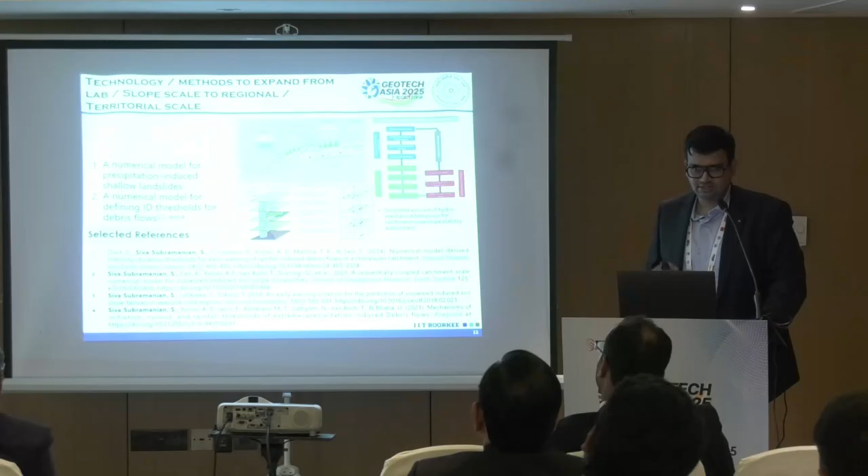Our intention here is to use these models to develop scenarios that account for conditions which have triggered landslides in the past, and then see whether the soil water index threshold will be able to predict the landslide or not. This is the approach we followed for the numerical modeling.

And we started testing it in a site in Uttarakhand. We have done field visits - we started with Kedarnath.

So how much time do I have left? It's already... 2 more minutes. Yeah, I'm almost near the conclusion.

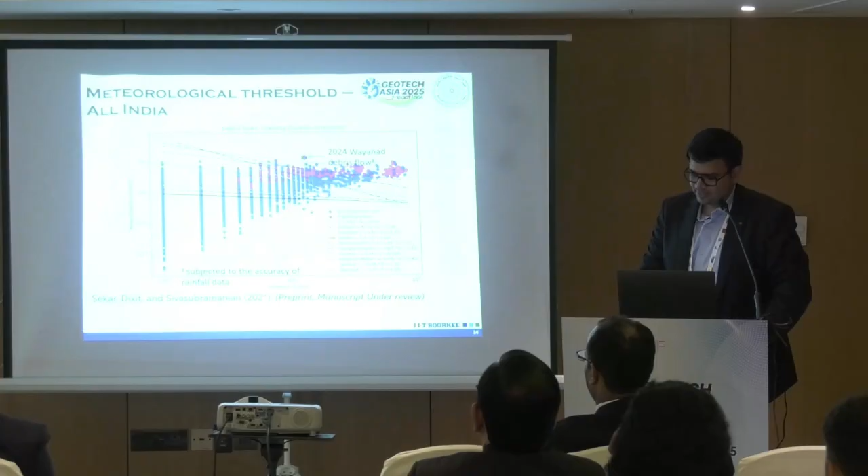So this is the intensity duration threshold which we have developed using the numerical model. As we can see, the existing thresholds were on the daily scale, whereas the new threshold we developed is on the hourly scale. The 2024 Wayanad landslide is also given.

And with the testing of the soil water index also for the same Uttarakhand region, this is the method we have used. So we have seen that the soil water index is also applicable for forecasting landslides in India.

More or less, it improves the predictive capacity of the existing early warning system, which only uses the meteorological threshold, whereas our system uses the hydrometeorological threshold.

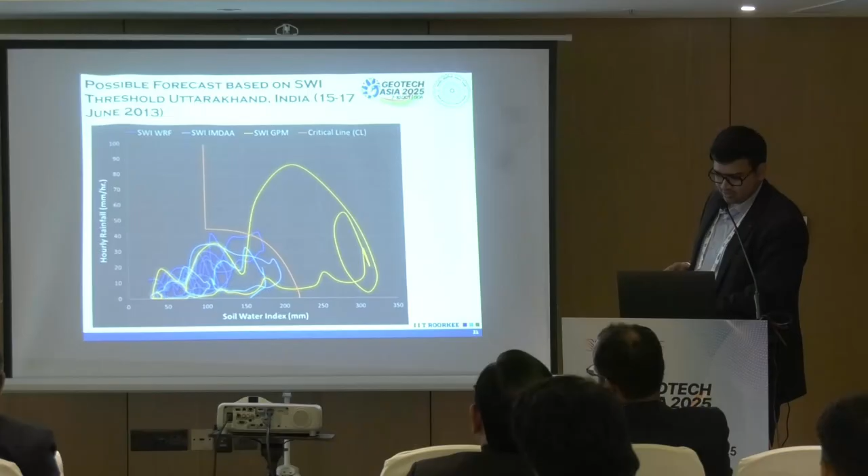So this is still an ongoing work, but it is working for Uttarakhand. We are yet to test it for other case studies.

So with this, I conclude my talk. Thank you, open for some discussions. Thank you.

Any questions? Very nice work, I'm really interested in this kind of work. But I have one simple question.

If you do for regional scale, like the ID, only threshold kind of things, this is also going to be some kind of biasness. So what I want to say is, did you validate this SW index with any other data?

Yeah, we have validated with case examples from Japan, and we have validated it for a hindcast mode for year 2013 landslides in Uttarakhand. And to account for the heterogeneity, we do sampling at different lithologies across sites in Uttarakhand. But that we did only for the Kedarnath catchment, not for the entire state of Uttarakhand yet.

The heterogeneity is more or less accounted for. Yeah, accounted, yes yes. We'll talk later.

Okay, other question I have is, you said it's nothing related to pore water pressure, but only matric suction. Yes sir. But matric suction is also nothing but negative pore water pressure.

Exactly, exactly. So what we want to mention here is, thank you for bringing up the clarity sir. Usually there is an observation that only positive pore water pressure drives instability. But even the loss of matric suction, even before it reaches positive pore water pressure, instability does occur.

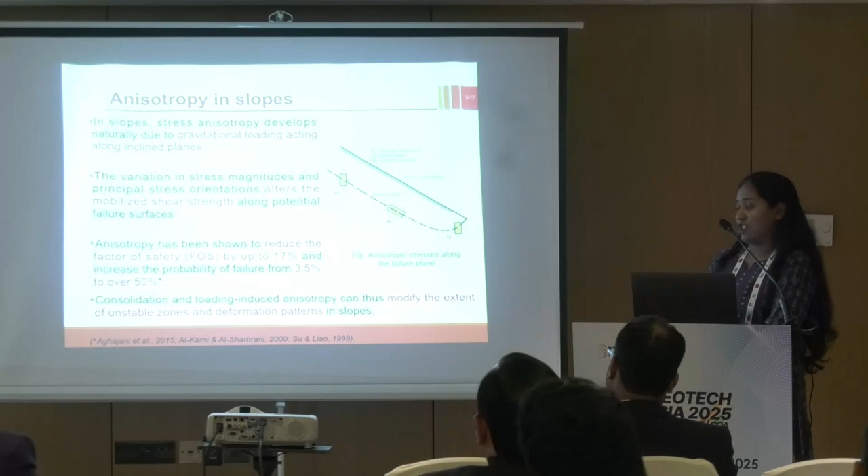So the effect of this anisotropy is that it will alter the mobilized shear strength of the slope, and thereby reduce the factor of safety. And in case of a slope, there is inherently gravitational loading acting, and this is causing this anisotropic effect.

So coming to the motivation of the present work, actually almost all the practical slope models ignore this anisotropic effect. And few advanced numerical models have evolved, which incorporate anisotropic constitutive behavior, but there is a requirement of direct experimental validation, especially at the element level.

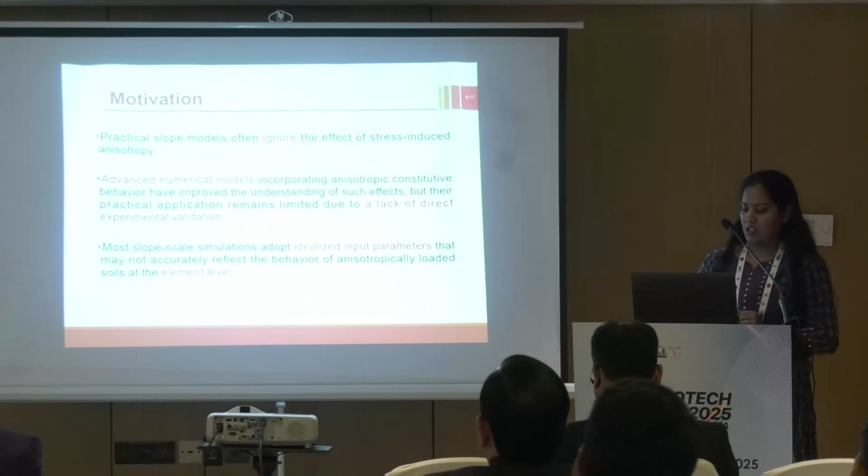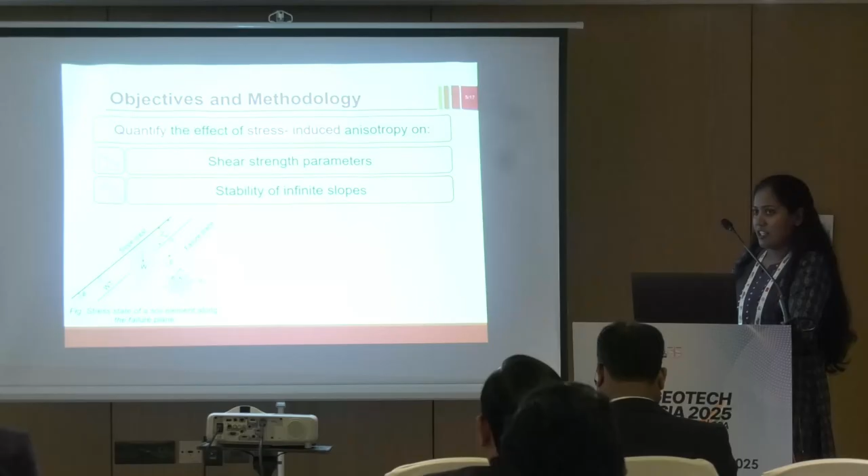So coming to the present research objectives, this present study aims to quantify the effect of stress-induced anisotropy on shear strength parameters, also to study its influence on the stability of infinite slopes.

So for this purpose, we are considering a soil element along the failure plane in the compressive zone as shown in the picture, and we are doing numerical modeling using Abaqus, and the same model is validated experimentally using advanced triaxial testing. And the results from this numerical method and experimentally validated results, we are using this in a real case slope scenario.

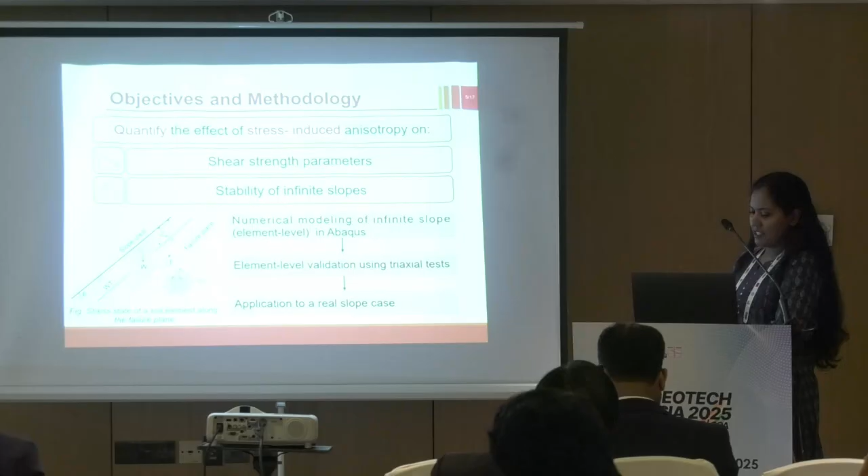So coming to the numerical modeling part, here we are using shear strength reduction technique, meaning we are progressively reducing the soil shear strength until failure. So for this purpose, we are modifying or reducing the shear strength parameters using a reduction factor RF. So this non-converging RF value will be interpreted as the factor of safety of that particular slope.

Now coming to the modeling part in detail, so I have already explained we are considering a soil element along the failure plane, that too in the compressive region.

So here you can see the element, the properties, material properties and other parameters are considered same as that of the experimental study. I am having a triaxial cylindrical soil specimen having 38mm diameter as shown here, and the same is modeled numerically. Since this is an axisymmetric specimen, we are modeling only one-fourth of the domain. Boundary conditions are also indicated.

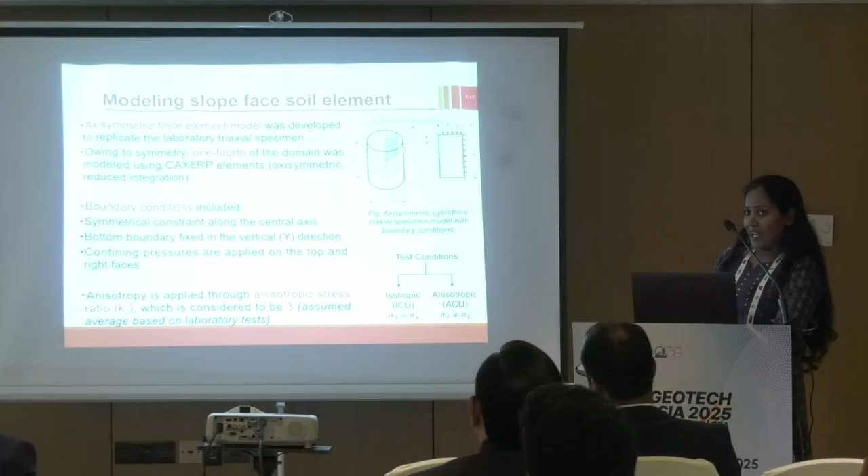Now coming to the test condition, we have two cases: isotropic and anisotropic. To bring in this anisotropic effect, we are defining a new term called anisotropic stress ratio, Kc, which is nothing but the ratio of principal stresses, sigma 1 by sigma 3. For maintaining isotropy, we keep Kc equal to 1, meaning sigma 1 equals sigma 3. For the anisotropic case, sigma 1 will not equal sigma 3. In this study, I have considered Kc value as 3, which is the assumed average based on various laboratory test results.

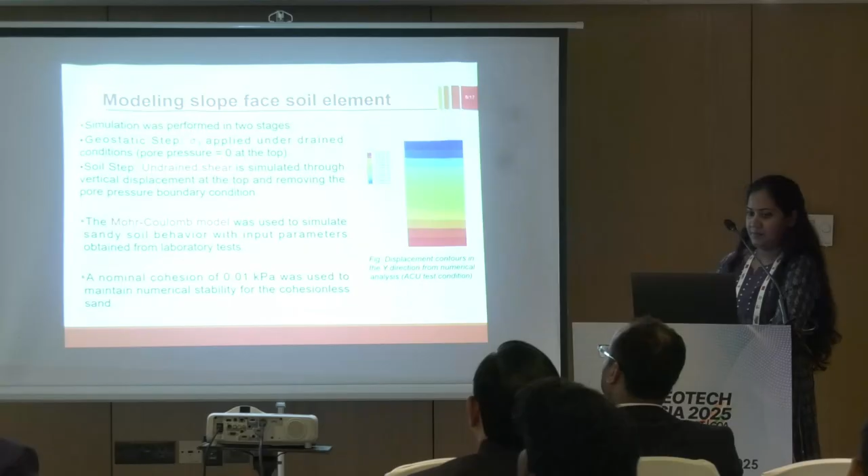Coming to the modeling part in detail: first is the geostatic step where we apply confinement to the soil specimen, and next, the soil step where we apply the undrained shear. Here you can see the displacement contours from anisotropic test conditions. The results I will explain in the coming slides.

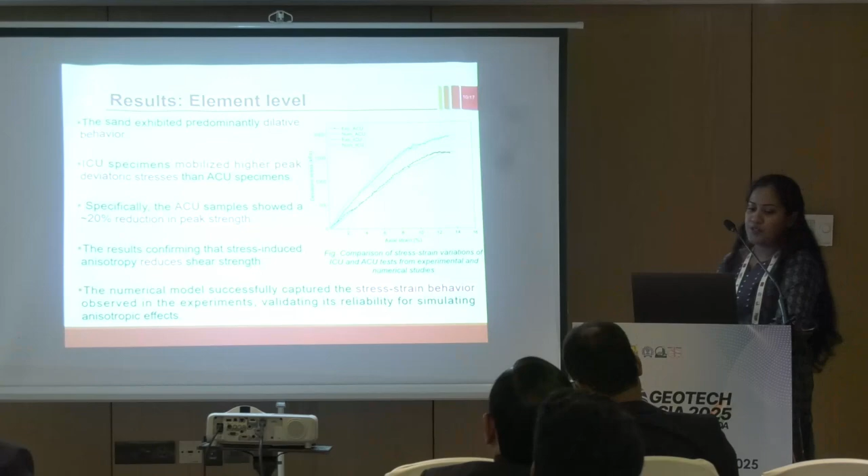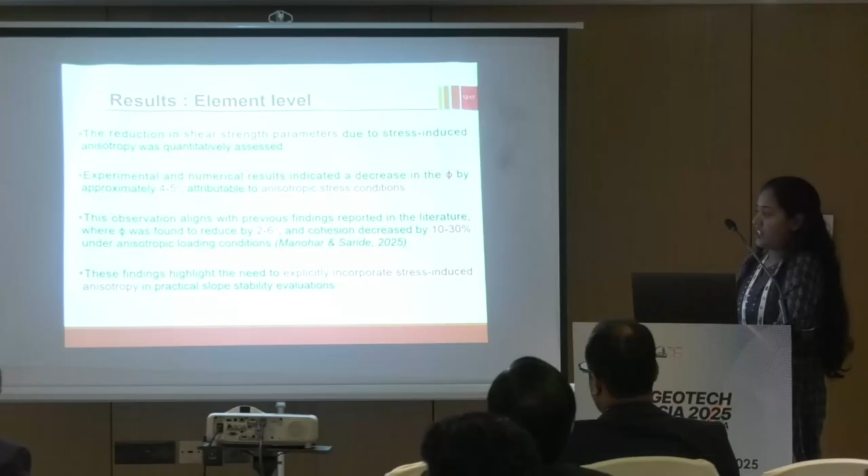The most important observation here is the reduction in factor of safety. It was observed that around 20 to 23% reduction occurred due to the anisotropic effect. Another important observation is the shear strength parameter variation: the friction angle was reduced by 4 to 5 degrees, attributing to the anisotropic stress conditions.

Here also we are modeling two scenarios, isotropic and anisotropic case. For the isotropic case, we are using original soil strength parameters, whereas for the anisotropic case, we have reduced the shear strength parameters by a percentage, exactly from the results we got from the previous section.

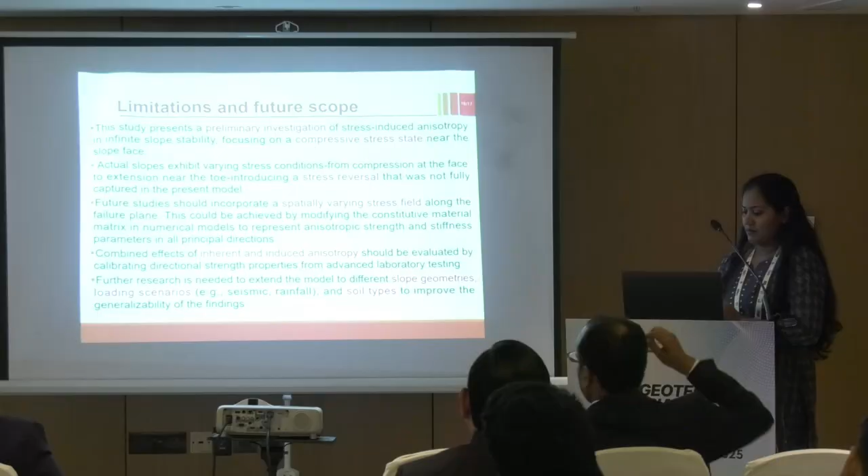Is it a coarse grain sand or is it a fine grain sand? Poorly graded sand, SP, poorly graded sand. Yes, the purpose of asking this question is that a number of recent studies have tried to solve this anisotropic issue, particularly in coarse grain soil, using fabric anisotropy, since these are granular materials. So why, if I may ask, have you opted to go for stress-induced anisotropy rather than fabric anisotropy? Because in stress-induced anisotropy, as much as I have understood, you are reducing the shear strength parameter based on certain laboratory test results. Correct? So what's your opinion, what's your take on that? How far will this be accurate in comparison to such models?

Yes, most of the studies actually focus on inherent anisotropy, that is, material property, inherent material property. This stress-induced anisotropy is a different type of anisotropy which is mostly overlooked in most studies. So in order to have more reliable estimates, as I have given in the limitations, we need to have the combined effect of induced and inherent anisotropy so that we get the complete idea of how it will reduce the overall slope stability. But the formation of the fabric can be because of inherent factors or the deposition that has taken place over the years, as well as because of stress history, right? So for a coarse grain soil, my point is, are they completely decoupled, or are they kind of contributing to the same thing? It is, in effect, contributing to the same thing, but it is two different phenomena. Inherent is different and induced is different.